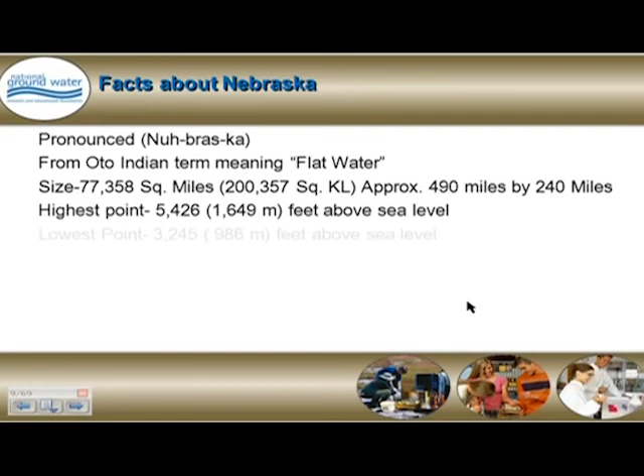I'm going to visit a little bit, for our folks who are joining us over the web, about Nebraska. You see where Nebraska is located, right in the heartland of the U.S. Some facts about Nebraska: it comes from an Oto Indian term meaning flat water. The size of our state's pretty modest. We're 490 miles by 240 miles, about 200,000 square kilometers. Our highest point of elevation is about 5,400 feet above sea level. Our lowest point is 3,200 feet above sea level. So if you take that 2,000 feet of elevation and stretch it over 490 miles, you can see why the Oto Indians called it flat water. There's not much drop there.

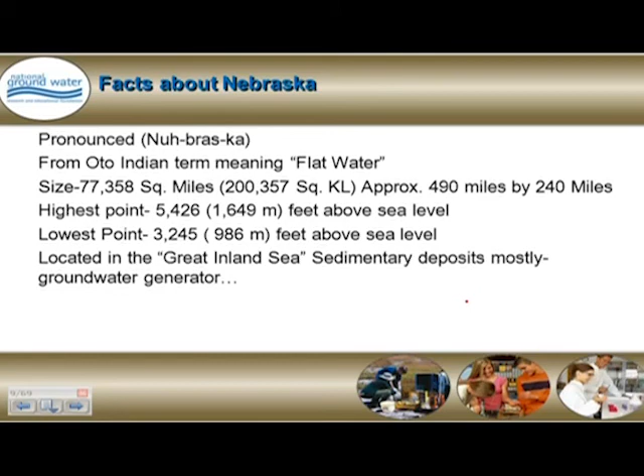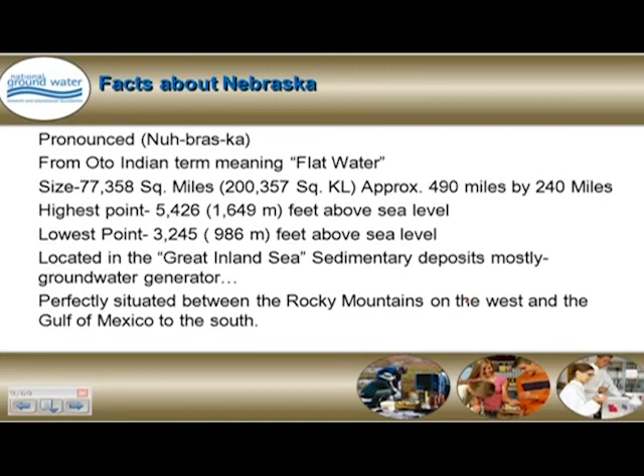Nebraska is known as a groundwater generator. For every gallon that flows into our state, 4 leave our state. That's because we're ideally located right in the middle of what the pioneers called the Great Inland Sea. Most of our deposits are sedimentary, and that allows us to create water, to store water. We are perfectly situated between the Rocky Mountains to the west and the Gulf of Mexico to the south. When the storms come over the mountains, the cold fronts are very dry, and they clash with this warm, moist air mass from the Gulf, and we get tremendous thunderstorms in our state, blizzards in the wintertime. So we get that precipitation in big amounts.

Some more facts about Nebraska. We've got about 1.7 million people in our state.

1.2 million of those people rely on groundwater for their daily use. Two-thirds of our population is located in the eastern portion, or the eastern quarter of Nebraska, mostly in two counties of Lancaster and Douglas County.

Our economy is agriculture based. We have industry and manufacturing that supports that agriculture. We average $3.2 billion in income in our state. 40% of that comes from the sale of cattle and calves. 31% of that comes from the growing of corn to feed those cattle and calves and producing ethanol and other corn products in our state. 14% of it comes from growing and selling of soybeans. And 4.3% comes from the sale of hogs.

Our greatest natural resource is our groundwater. We don't have the forests, we don't have the mountains, we don't have the beautiful sceneries that I've seen across the country and other states, but we do have more groundwater than a lot of states combined. The USGS estimates that if we could bring our groundwater to the surface, we would have a lake surface larger than Lake Superior, Lake Michigan, and Lake Huron combined. It would be the biggest lake between the Great Lakes and the Great Salt Lake.

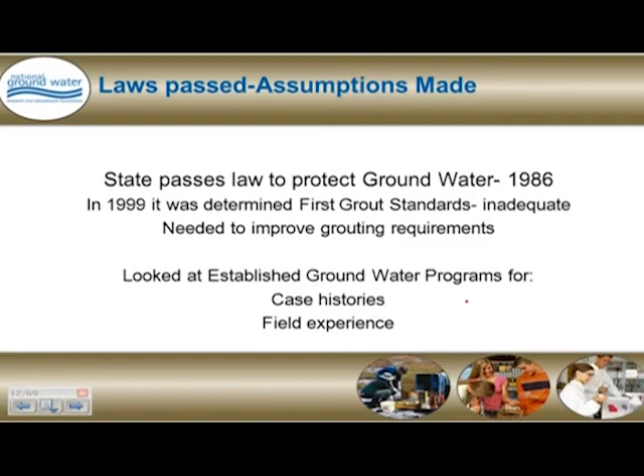In 1999, after we'd had standards for almost 11 years, we determined our first grout standard was pretty inadequate. Our first grout standard was a half a pound of bentonite per gallon of water. It was not sufficient in order to protect our groundwater. So we needed to improve our grouting and improve our requirements. We looked at other states for case histories and field experience and what they did for protecting their groundwater. And what we found was, they told us, rely on this. Full-length grout provides maximum protection of the groundwater. When in doubt, just grout your hole, and all grout materials are pretty much alike.

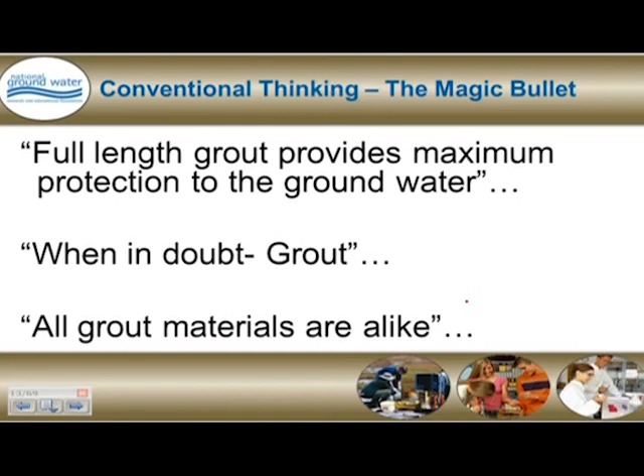And what this did, folks, this put us in a conventional thinking mode. We kind of locked our brains in a box, and we took what other people told us for fact. We looked at the prevailing technologies for how grouts were studied prior to 1999, and we found out that most of them were studied in laboratories. These were in controlled environments. There were some in situ studies that were done, but they were historically destructive, they were limited in their depth of view, and they were segmented.

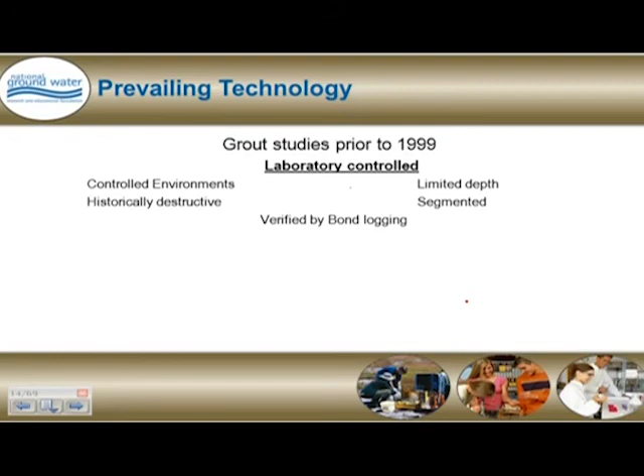To verify their findings in these laboratory studies, they used a technique called bond logging, and that's when they put an acoustic ping in the casing to see if there is any hollow portion behind that casing. If the grout was present, that ping would come back quickly. If the grout was absent, it took a longer time for that echo to come back. So that's how they verified their beliefs that all grout materials are alike. Full-length grout provides maximum protection of the groundwater.

We were told that the two products we should look at were cement grouts and bentonite grouts. Cement grouts because they provide super structural stability to the well casing and the borehole, and bentonite grouts because they're more flexible, they're more pliable, and in the sedimentary deposits, they will rehydrate. So we looked at these. Cement grouts we found were considered a universal grout.

You could use them in all kinds of applications. Water quality didn't affect them. Ground quality didn't affect them. Their drawback was they had limited cracking, but it was mostly a horizontal cracking, and it bonds to all types of materials. I mean, anybody who's poured a sidewalk or mixed concrete knows that concrete sticks to their shovels, sticks to their wheelbarrows. It's really nasty stuff.

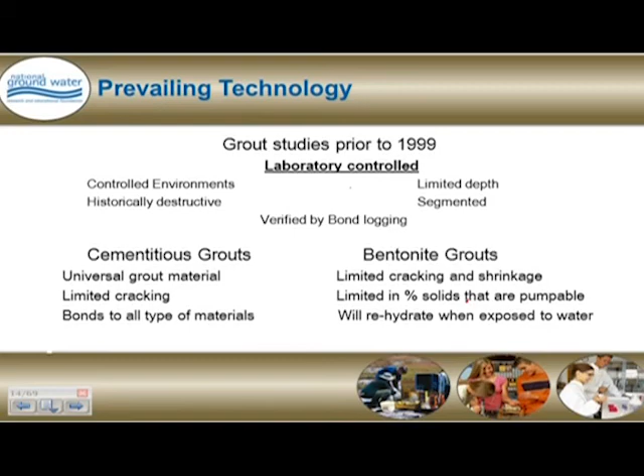The bentonite grouts, we were told, they would also crack, but they were limited in that cracking and shrinkage. But the big drawback was you could only pump about 20-25% of active solids in a bentonite grout. But the redeeming factor was bentonites rehydrate when they get wet. That's what they do. They swell up and they'll repair themselves.

So, based on this conventional thinking, the state revised the standard in 1999, and we adopted the national belief. We took as the bentonite grouts a 20% active solids bentonite. It had a permeability standard of 1 × 10⁻⁷ centimeters per second. And we felt pretty good about this. We now joined the rest of the country in providing groundwater protection.

Well, shortly after that, the bentonite industries came to us and said, we've put a lot of money and a lot of research in a grout product that's less than 20% solids. It has the same characteristics as a 20% solids, has the same gel strength, has the same permeability standard, and now they can't use it in Nebraska.

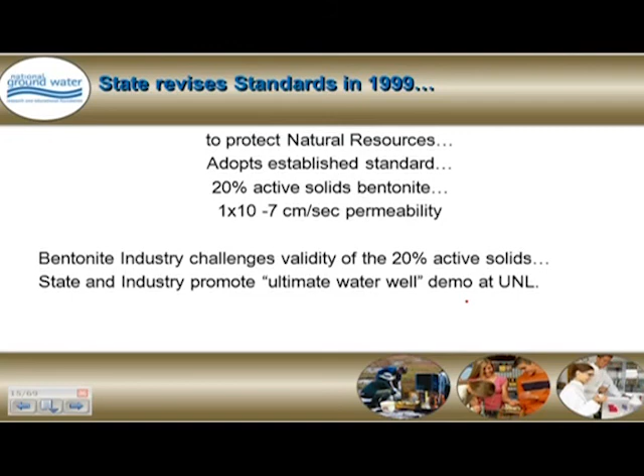So, with the bentonite industry's cooperation, the state of Nebraska decided to construct the ultimate well. This was going to be the way everybody should make wells. And for the first time, we held a demonstration at the University of Nebraska. What you're seeing on the screen is the first time anywhere a water well has been filmed from the inside out during its construction.

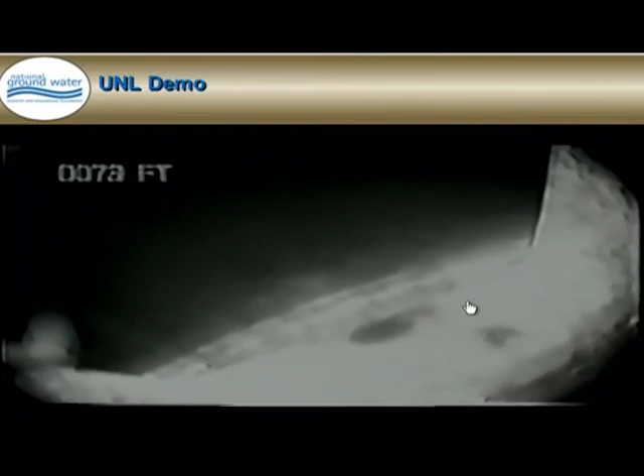By using clear PVC casing that was normally used for food handling, processed cheese and milks and things, we took advantage of this clear PVC to see how grouts would be affected in the ground and how to properly make the perfect well. What you're seeing on the video now is the gravel pack has just been placed over the top of the screen, and we've just opened a bag of bentonite chips and poured those down the borehole. They're a free fall chip.

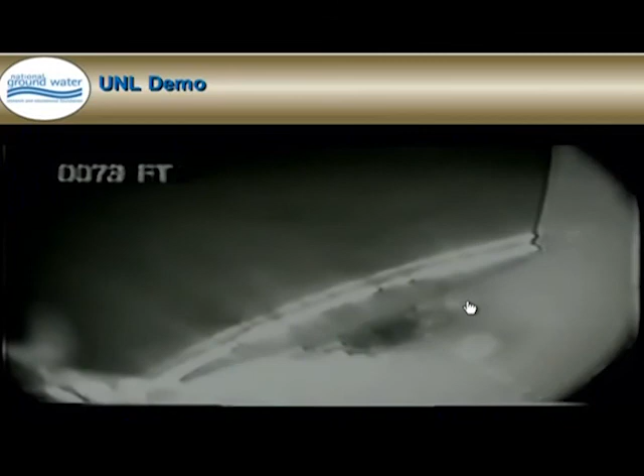We poured them in a real deliberate fashion, and what we really wanted to see was how these chips form a seal, because this is a product we use a lot in Nebraska and have used a lot since 1986. We wanted to see if the chips would align themselves, if they would make a good seal, if they would bridge, if they would impact the gravel pack.

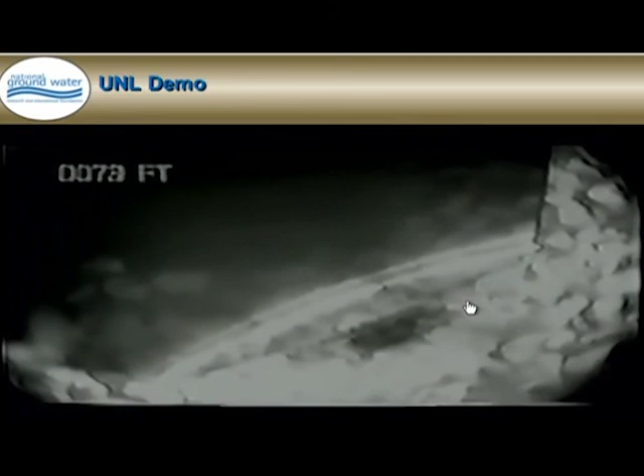And as you can see, the chips kind of find their own place in the borehole. They align themselves in a real nice, orderly fashion, and they make a good, tight, homogeneous, uniform seal. We were really happy about this. This was really encouraging. So now we decided to start pumping our grout slurry.

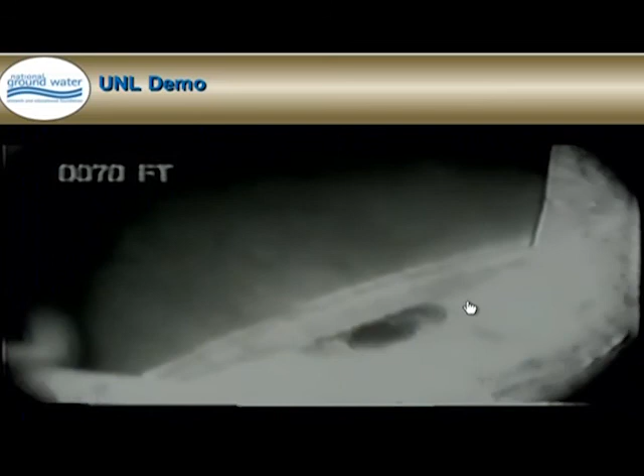And you can see our grout slurry is coming up in a very quick manner, just like you want bentonite grouts to do. They come up the borehole in a rapid fashion. They evacuate everything out in front of them that's liquid. And you can see the grout itself has got a nice kind of a pudding consistency to the grout. It's looking really good. In fact, it came up the borehole so fast, it outpaced our camera.

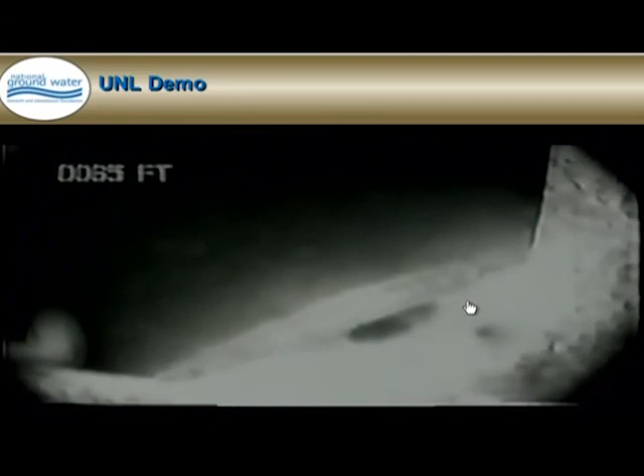So once we caught up with the top of the column, we watched how the grout migrated up the borehole. When the grout would meet an obstruction, say a piece of bentonite that stuck to the side of the borehole wall, or some cuttings that didn't quite get cleaned out, the grout, instead of evacuating it, would just entomb it. It would surround it and encase it and kind of make it part of the grout column.

This was the ultimate well, folks. This was how we make monitoring wells in Nebraska. This is full-length grout to provide maximum protection to the groundwater. We were very excited about this. Wow, look what we did. Until we went back 14 months later to follow up on this. Most of that grout column was missing. It's gone. And this is how you get started in research.

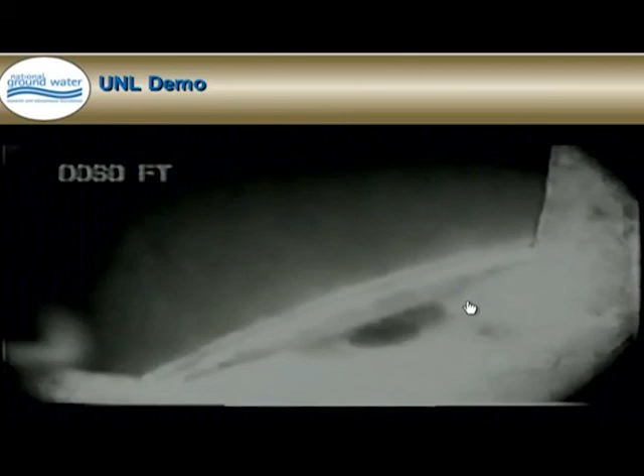So this is what we did in Nebraska. Our study is going to change that. Our study is going to utilize this clear casing where we can see things that have never been seen before. It's a visual component. We're going to look the full length of the borehole. We're going to take this out in the real world. We're going to do in situ testing for the first time. And nothing's going to be destroyed because all we're doing is taking pictures. We're just doing observations. We can dye test this.

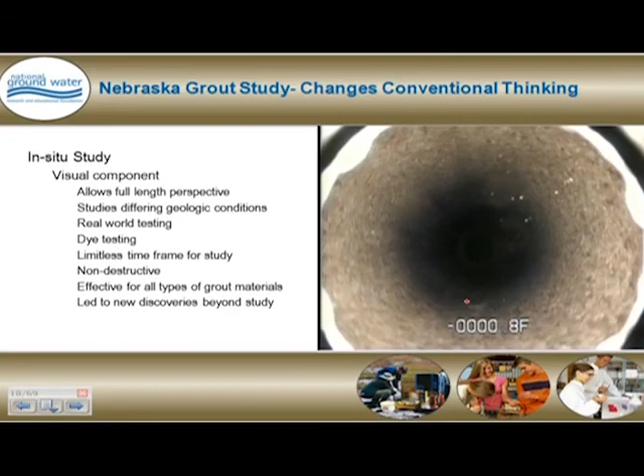We thought we could keep these wells for an unlimited amount of time. And in reality, we got about 8 years. And after 8 years, the casing gets cloudy and you can't get a picture. If you can't get a picture, your visual study's over. But we can use it for all types of grout materials, and we can put it in all kinds of geologic sites, and it's effective for all kinds of grout materials. And in fact, some of the findings out of this led to new discoveries beyond this study. And we'll talk a little bit more about that later on.

Early on, it was felt that our study needed a mission statement. And the mission statement to keep us focused was, we are going to look at the products used for grouting wells, not the people who make the products. We're not comparing manufacturers, we're comparing bentonites, certain grades of bentonites, certain degrees of cements, and we want to study the properties and how these react. And because of that, we got great cooperation from the industry. The bentonite industries and cement industries gave us all the information and the support we needed.

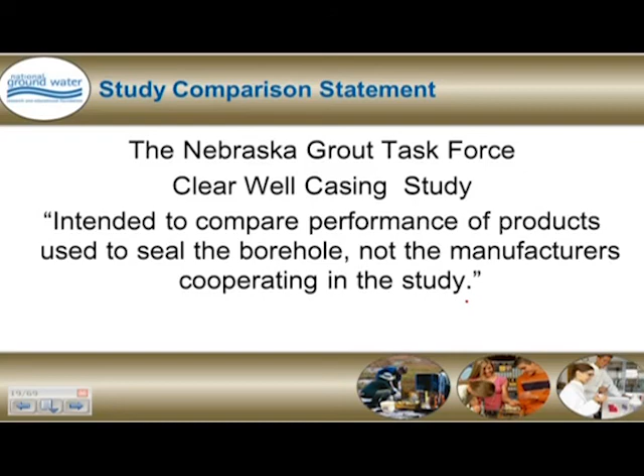One thing we learned, when we made our ultimate well at UNL, we didn't do any background testing because it wasn't research. It was a demonstration of the ultimate well. So when things went bad, we found out that we didn't do anything for testing the ground, testing the groundwater. Were there contaminants? Were there conditions that would affect grouts? We didn't know. So when we chose our study sites in our state, our university went out and they took core samples of the soils.

We studied those for particle size, moisture content, for any contaminants that would degrade a grout. We also studied the water quality for those contaminants and those parameters. And then when we were done with that boring, we put a monitoring well in that site, and we would monitor the fluctuations of the static water table. What increases in water table or decreases in water table affect our grouts? This is what we're going to find out.

Here's our study sites. The eastern part of Nebraska, with the yellow circle and the green triangle, is going to study grouts in the glacial deposits of Nebraska. These soils have been influenced by glacial melt. They have a lot of fat clays, a lot of tight clays. They have perched water tables. They get a lot of moisture, so they are a high moisture content area of our state. It's where most of our population is centered, so we're going to study wells in that portion of it.

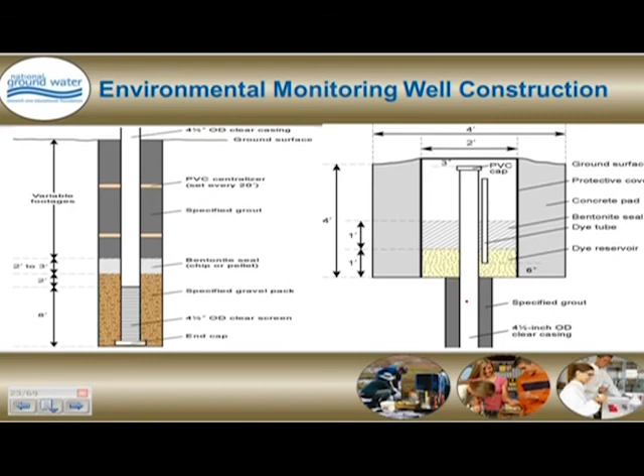One thing we learned in the university study is when we wanted to find out how badly the grout was cracked, we tried to pour dye down the hole, but the dye went everywhere. So our task force came up with a containment vessel that we designed, about a 4-foot deep flush buried cover, and in the bottom of that cover we poured about a foot of gravel, and our dye tube terminated in that gravel. So when we dye tested this, the dye would load the gravel and it would put an equalized pressure on top of the grout column, so we would get a uniform standard looking at validating our grouts.

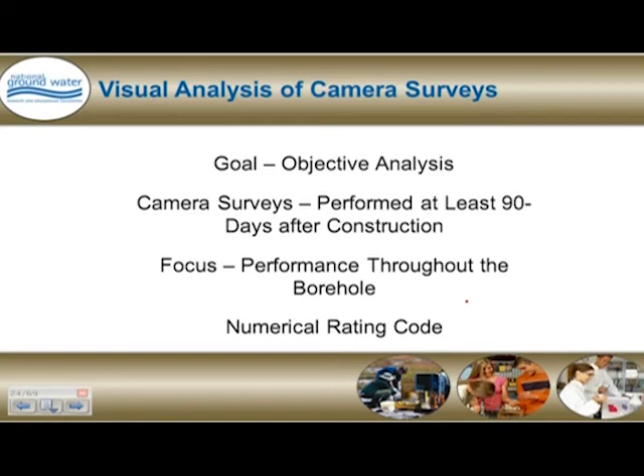The goal of this visual study was to be very objective analysis, so we went foot by foot of the borehole. Our camera surveys were performed 24 hours after the grout was placed, so we got a new picture. We came back 30 days later, 60 days later, 90 days later, so we got a nice time-lapse photography on how all this grout ages. And in doing that, we had to come up with a numerical code to put this on a graph, so we could chart it. I want to show you what that visual assessment graph looks like.

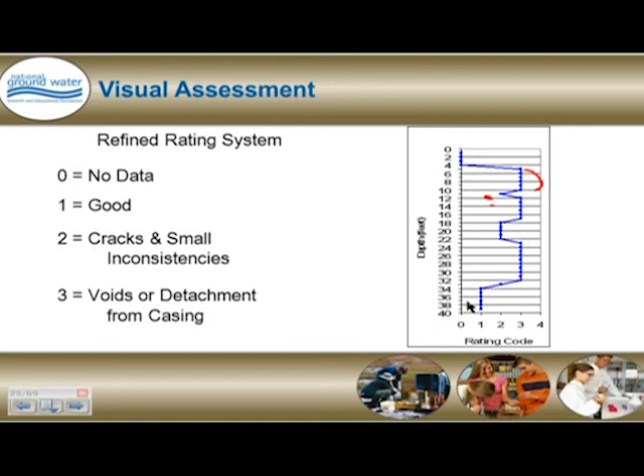To give you an example, Code 1 is a good grout. That's a 24-hour picture of a bentonite slurry. And that looks just like a downhole video camera of a PVC well. There's no wrinkles, there's no inconsistencies, there's no cracks. It's almost letter perfect. That's a 24-hour picture.

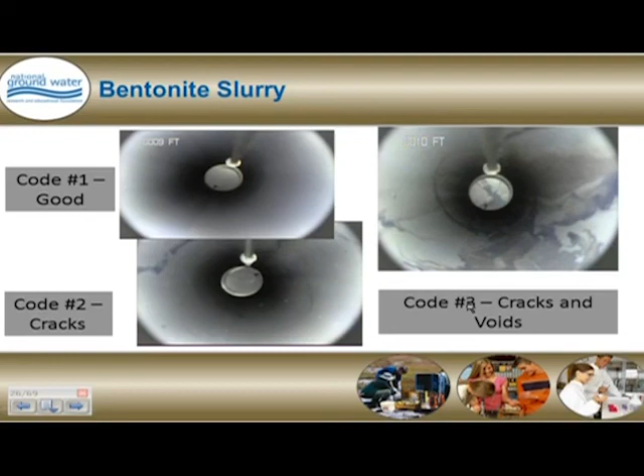Code 2 on a bentonite is about a 60-day picture where we're starting to see cracks form, starting to see some separations, we're starting to see a little bit of division, but the cracks aren't connected. We still feel it's got a good potential for being a sealable grout. But Code 3 is a picture after 90 days. And we see huge chunks of bentonite missing. We see the cracks are connected. And we no longer feel that this would provide us any groundwater protection.

We looked at bentonite chips. We had some wells that were full-length grouted with chips, just to see what that would look like. Once again, a Code 1, the bentonite chips are nice and tight. They look solid. You see the discoloration of the chips as they've melded together. 24-hour picture once again. Code 2 was a 60-day picture where you see the chips are kind of pulling apart, separating, but they're still in place.

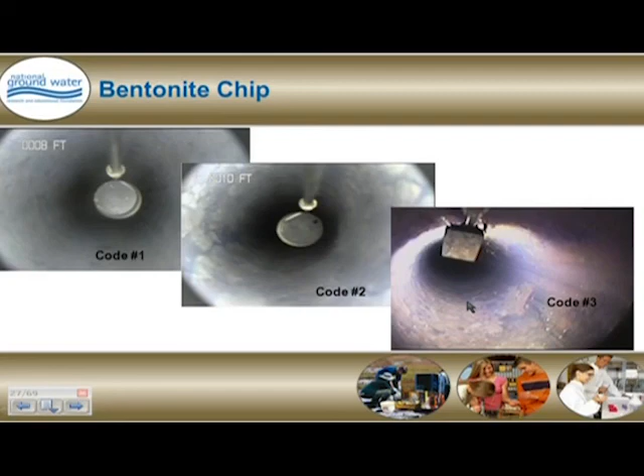But Code 3, we're showing you a picture of a major void in a chip seal. And this is where the borehole was either we had a blockage, or we had a bridging, or we had a big void behind our grout column. And either way, it's either a product or a placement issue. This is to show you how big a void you can have in a 70% active reactive solids grout. And that was over a 90-day picture.

Cements are entirely a different story. Okay? Code 1 was a 24-hour picture. It's a neat cement that's nice and tight. There's no cracks, there's no wrinkles, there's no discoloration. Code 2 is a picture less than 2 weeks old. And we're already seeing vertical cracking. Now, we were told horizontal cracking is what you can expect in cements. It's a stress crack. We weren't expecting to see vertical cracking, straight up and down. That's 2 weeks. And the Code 3 was a 30-day picture.

So cement grouts get to their static condition within 30 days. Bentonites take about 90 days. Once the cement's cracked, it's cracked. We're seeing detachments where the casing is pulled away, and we're seeing big voids. And what you're seeing down in the lower right-hand corner, that's a placement problem. That's where the tremie was plugged and was reinserted, and there's a water bubble right in the middle of your grout column. Okay? So it's not only just a product we're looking at, it's placement.

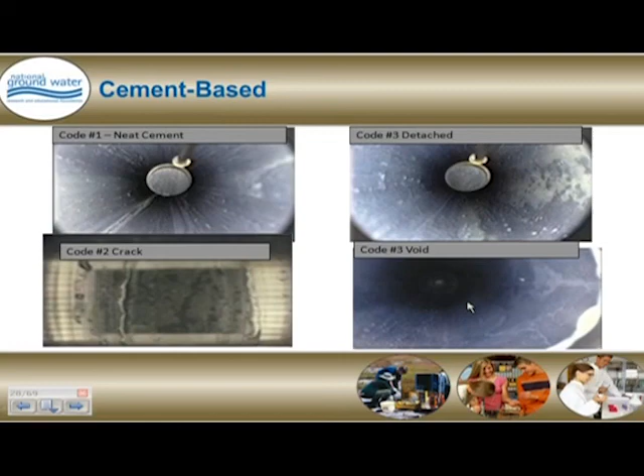Now our next challenge, when we went to study the geo-exchange system for closed loops, nobody makes closed loop piping that's clear, and it's never big enough to put a camera in. So in order to study the grout, we had to insert a clear sight glass right in the middle of our loops. And this did two things. This allowed us to look at the grout full length, but it also allowed us to look at a grout in a larger than normal situation of a borehole. We had to drill almost a 10.5-inch borehole for two 3/4-inch loops, and nobody does that in the real world. So we're looking at an overgrouting situation and how that would affect our grouts.

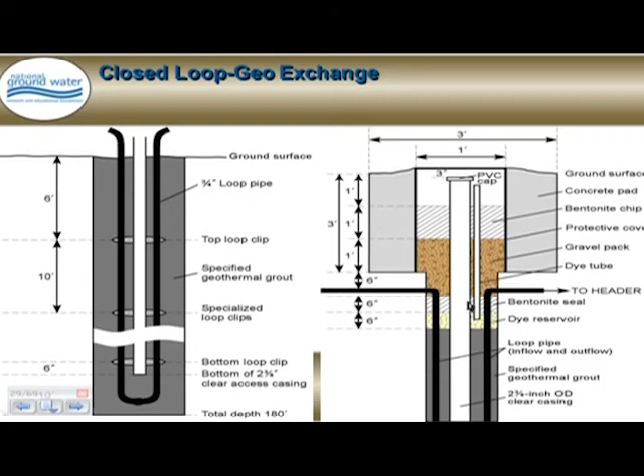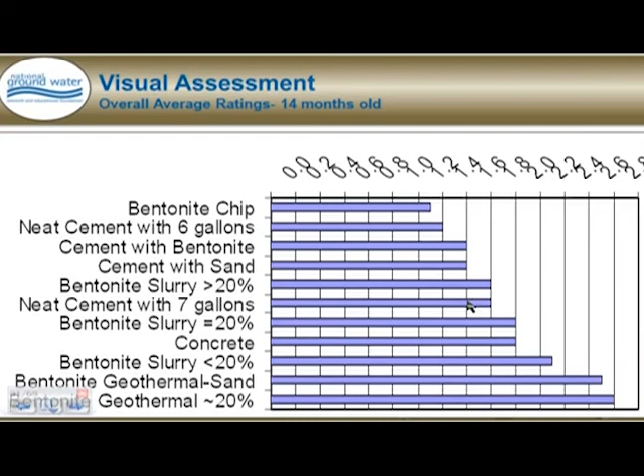Now there's recipes in there that are averaging over 2.6, almost a 2.8. If you're averaging over a 1-year study a 2.8 on the condition of your grout, it's no longer a grout. It's not even a good annular fill. So we are seeing some things here. We're eliminating some things. We're coming to some preliminary conclusions, but we need to validate it.

Because ours is a visual study and bond logging is not going to work to validate our process, we chose the dye testing. The dye will show you where your cracks in your grout lead. We asked the state of Ohio, who's been doing dye testing for 20 years or so, what to use, and they said use a green colored dye. Green is not a natural color for groundwater. If you've got green in the groundwater, it's pretty bad. So there are other dyes that are oranges and browns and reds, and they could be confused with iron deposits. So we chose a fluorescent green dye.

Our procedure was to dye test these wells for an hour or until our dye tank ran dry. We had 200 gallons of dye mixed up, whichever came first. We would meter the volume that was used and the time it took for that dye tank to run out, and what that did, it allowed us to calculate proposed maximum depth the dye could be detected. How far would it really travel in a certain period of time, and how much percentage of the grout column would be penetrated by that dye.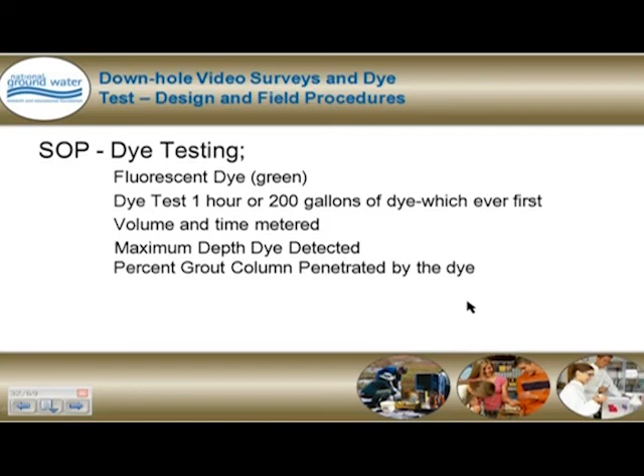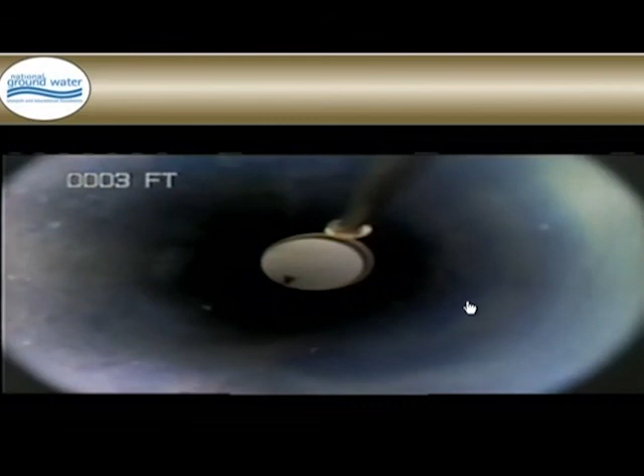And now you're going to see the first horror picture from the study. What you're seeing is a dye test, and that's green dye flowing right out of our dye tube. We're dye testing a bentonite slurry, and we're just coming out of the flush mount. Now this green dye is flowing about 5 to 6 gallons a minute. It's going down the borehole faster than we can lower our camera. You can see the grout is cracked. It's detached. Dye is not only flowing through the grout, it's flowing between the grout and the casing.

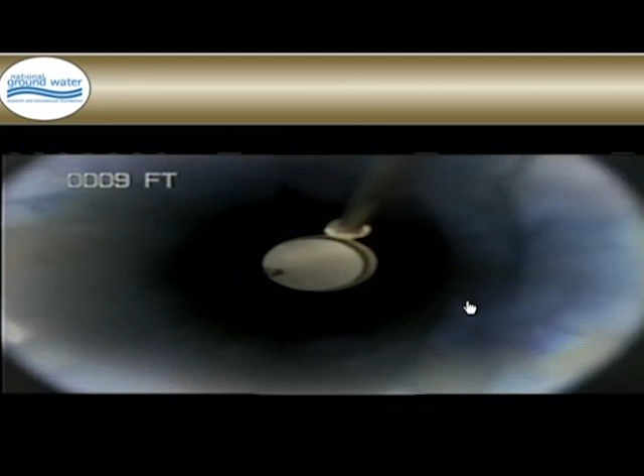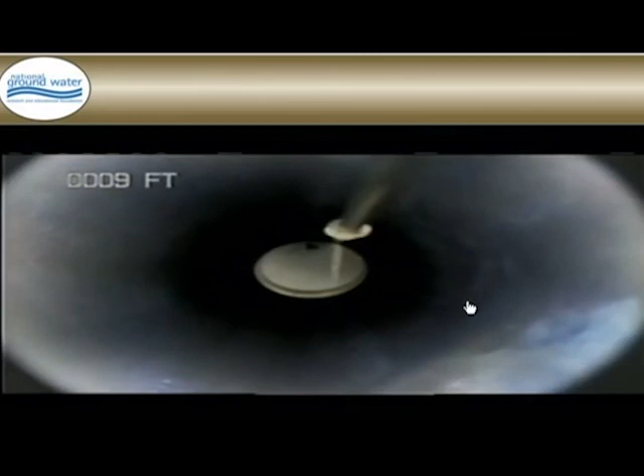This is how we construct monitoring wells for cleaning up groundwater at the time. This was maximum grouting, providing maximum protection, full-length grout. Well, we watched this to about 9 feet, and we got pretty shocked, but now we're starting to see some ponding coming up in the borehole. And we're feeling, hey, maybe our grout column is intact at the bottom. We kept watching, but what happened was that wasn't ponding. The dye ran so fast it took the gravel out of the flush mount and took it down the borehole and bridged. That's how big the cracks were in this 100% grout.

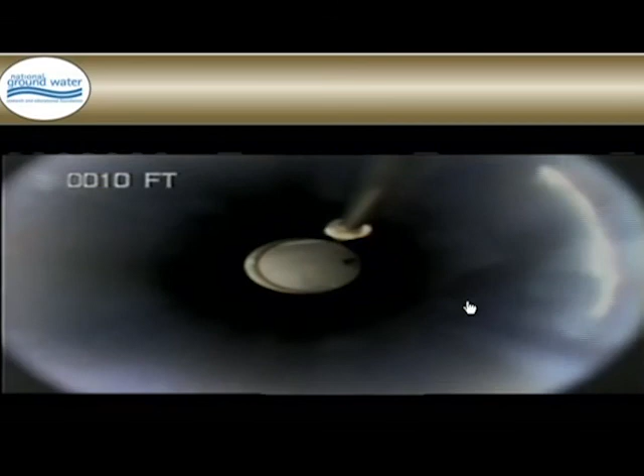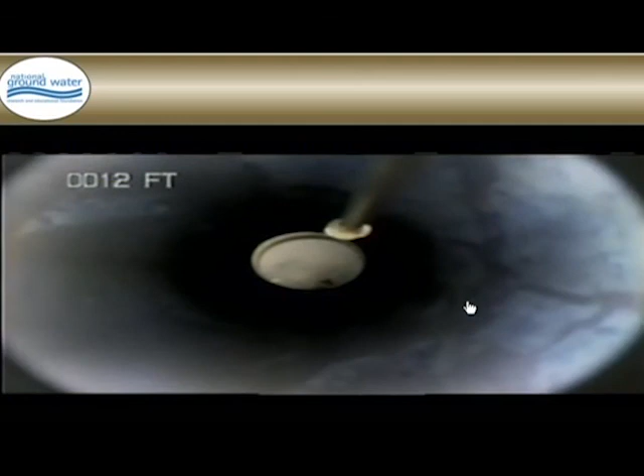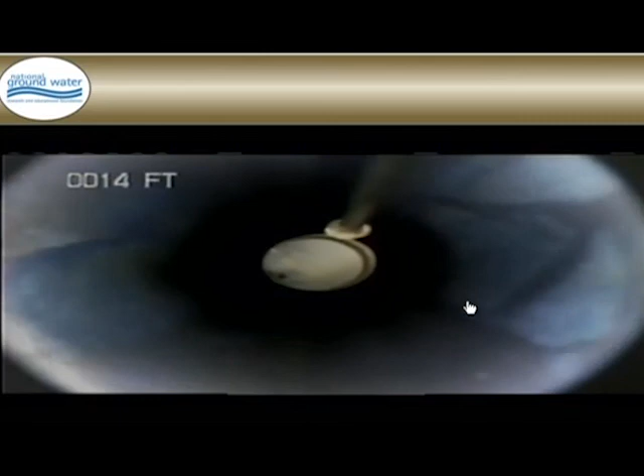So we kept watching, hoping, and it kept looking pretty dim until we get down here pretty close to the static water table, and we do actually see ponding take effect. We do see some good news, folks. Why do I say that? Because if we don't see ponding, we know that the grout column is shot clear to the aquifer. This dye would have gone out in the aquifer. We would have never got any trace of it back.

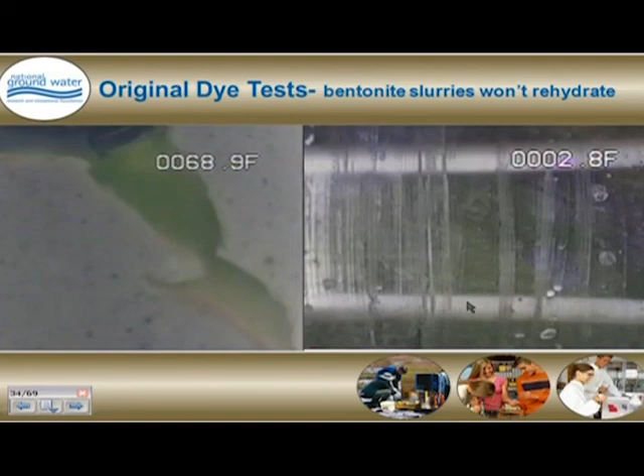Now that's different than what we were told. We were told bentonites have this absorbent quality. They get wet, they want to rehydrate and reswell. It's undetermined why this happens. It may be because in order to mix a grout slurry, you have to have shearing action to drive the water into the particle. Then maybe there's retardants built into the grout that keeps it from flashing in the grouter. But for whatever reason, if a bentonite slurry cracks, it cracks and is not coming back. A new unexpected result.

I wanted to show you this slide. This is more of a site comparison. If we can go over here to the screen. This is from the northeast, the central, and the southwest. And this is based on cement grouts. And you're going to see on every chart, on every average, the northeast is at the top.

The dye penetrated not as far in the northeast as it did in the southwest. In every instance, the southwest, the dye went further. This is a cement bentonite recipe. This is concrete, neat cement 1, neat cement 2, and sand cement. But when we stepped back and looked at this, we noticed there's something missing here.

In the central, we don't have any movement in a sand cement. This is where we discovered we matched a grout material, sand cement, with the material outside the borehole. Remember I told you the central was all sands and gravels? So these two matched, and we got a really good result on how this grout was going to progress.

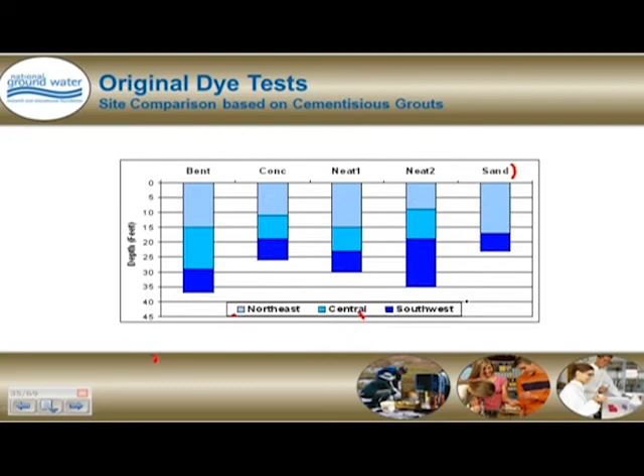Okay, now this chart, just to re-illustrate that, based on cements again, on 1 hour and 24-hour movement, I want to show you this. This bar here is how far the dye moved in 1 hour. Okay? This bar here is how far it moved in 24 hours. In almost every instance, this dye went a lot farther in 24 hours than it did in 1 hour.

In these two, the glacial, the southwest, this dye has gone behind our column. It's already dissipated out. But look at here. This is alluvial, glacial, and southwest sites. In the alluvial site, the sand cement, we had no movement in an hour, and we had no movement in 24 hours. We finally matched the grout material with the borehole material.

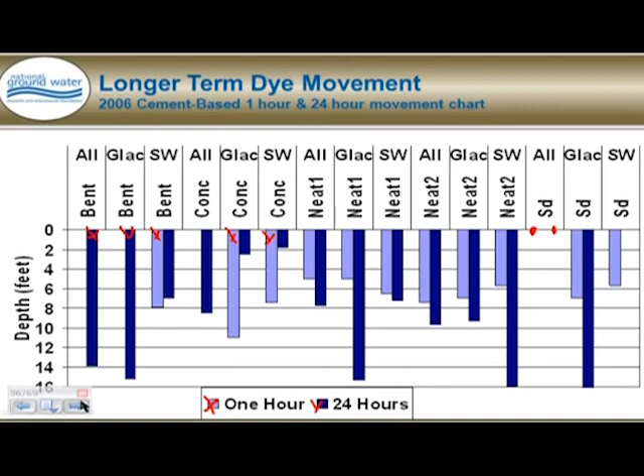Another unexpected result. I showed you this chart just to give you an illustration not to trust your eyes. The column on the left, the performance column, is based on the results of the dye testing. The next column, the visual column, is based on what we thought we saw. And you'll see that we didn't pick a winner. Every grout we give a value to performed differently.

And that's to tell you that not all cracks are connected. Not all visual things are as bad as they look. Some look better. For example, the sand cement performed a lot better than what we thought it looked like. We saw some cracks and separations when we dye tested it. It did better overall than anything. And the chips, which we thought looked better than anything, did slightly worse.

But if you look at the chart again, at the very bottom, bentonite slurry, less than 20%. Closed loop bentonite, equal to 20%. These are high water slurries. We're seeing some indications here that solids are playing a role in how grouts perform.

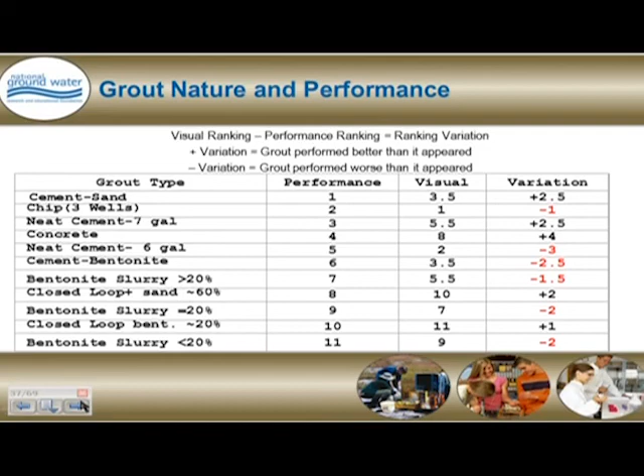Our third unexpected result is we found out that neat cements will blow right through a bentonite chip seal. And this is another way we make monitoring wells. If you put a chip seal down like we saw in the video, right above your gravel pack, and then your grout column is neat cement, this neat cement has enough weight and enough characteristics, it divides the bentonite chips and it gets right down into the production zone.